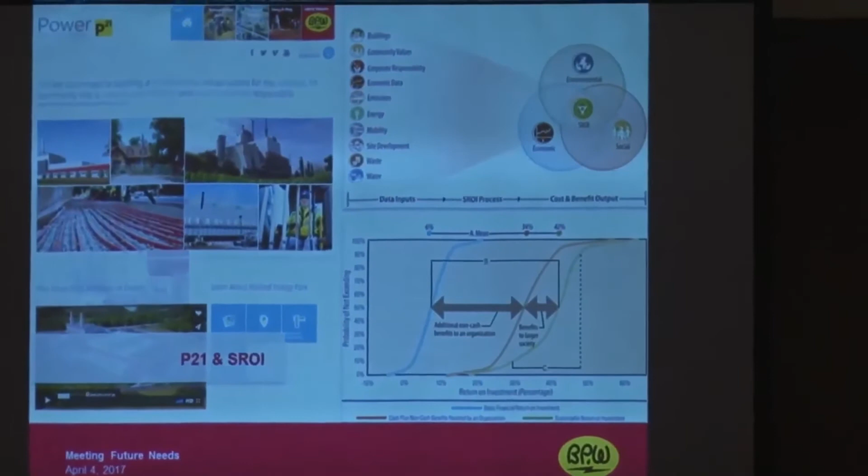They look interesting, but essentially what it means is everything is probabilistic. We don't know what the price of natural gas is going to be tomorrow, but it could be between here and here, as a probable range. We don't know exactly what the social or environmental impacts of emissions from different power supply resources are. There's still a lot of literature and research going on in that regard, but it's probably between here and here. So everything kind of came down to some probabilistic analysis.

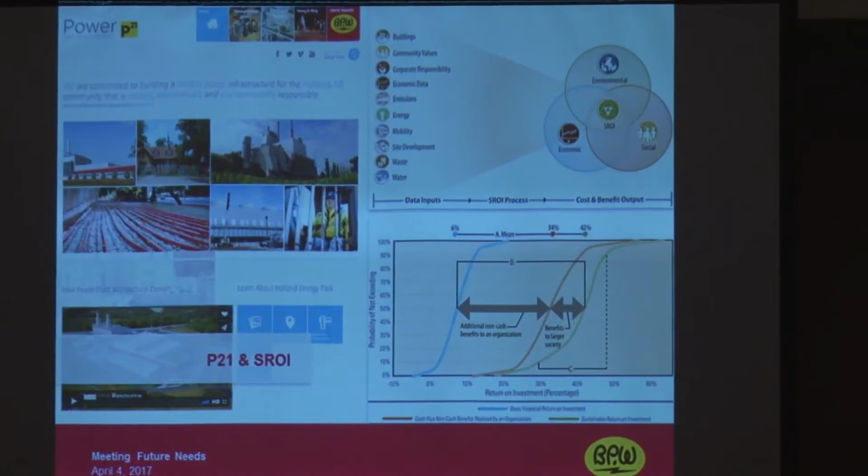But in the end, something really bright line sort of emerged, and that was natural gas combined cycle technology. I've got a sheet here on your desk if you're interested in how that works. We're going to talk about it in a little bit, but it's also there for you if you want to see that.

I've got a short video next that kind of shows the outcome of this process. Remind you that this was about 3-4 years ago, so kind of keep that context in mind.

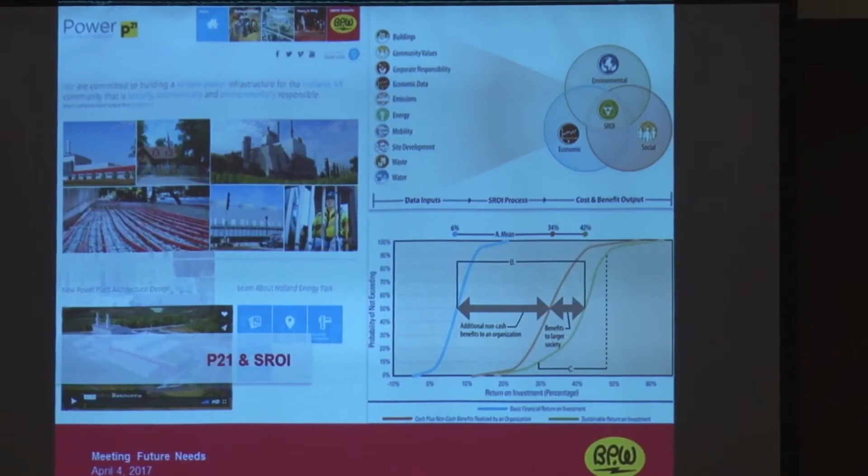Holland has always been a community that works hard, and for more than 100 years, the Holland Board of Public Works has supplied the power to keep our town growing. As our community grows, so does our need for power. By 2016, the increased demand for power for our homes and businesses will exceed our baseload generating capacity. Over the past several years, we have considered a number of ways to meet our community's need for more baseload power. It's a complex question.

Last year, we hired HDR, a global independent consulting firm, to help us conduct an exhaustive sustainable return on investment study. It looked at affordability and reliability, but also at the social, economic, environmental, and health impacts of a variety of options. The HBPW belongs to the community. Our process included people from all across our city to make sure their voices were heard. Their input helped keep us on track for integrating our new power generation with Holland's Community Energy Plan.

We looked at a lot of options, everything from state-of-the-art solid fuel generation to renewables to purchasing primarily from the grid.

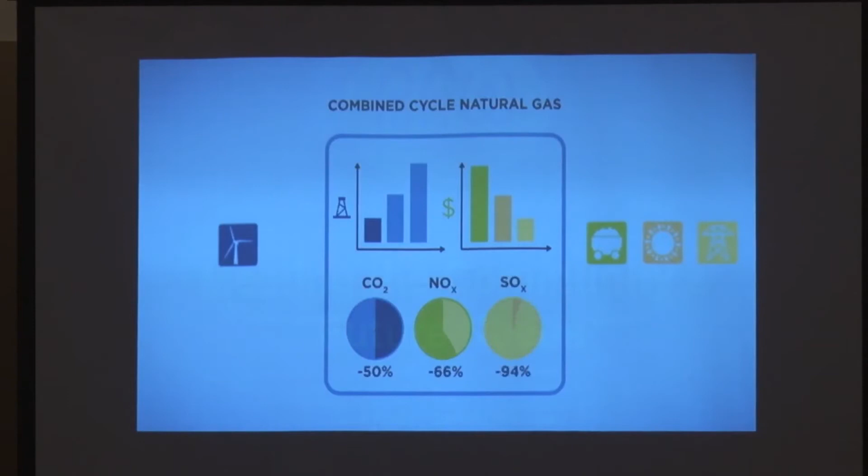One of the most promising solutions comes from combined cycle natural gas technologies. Natural gas is plentiful, affordable, and cleaner than other alternatives. With local generation, the HBPW can expand the services that make downtown great, things like the snow melt system that keeps streets clear during winter, and district heating that could heat hundreds of homes and businesses. Clean, affordable power is essential to the success of Holland's innovative community energy plan, and we are well on our way. There's work left to be done, but we're excited about the direction we're headed. As we move forward, you can count on the Holland Board of Public Works to keep Holland working.

So that was quite an amazing process we went through. I do want to highlight a little bit what was touched on there. Why is combined cycle technology an important choice for Holland?

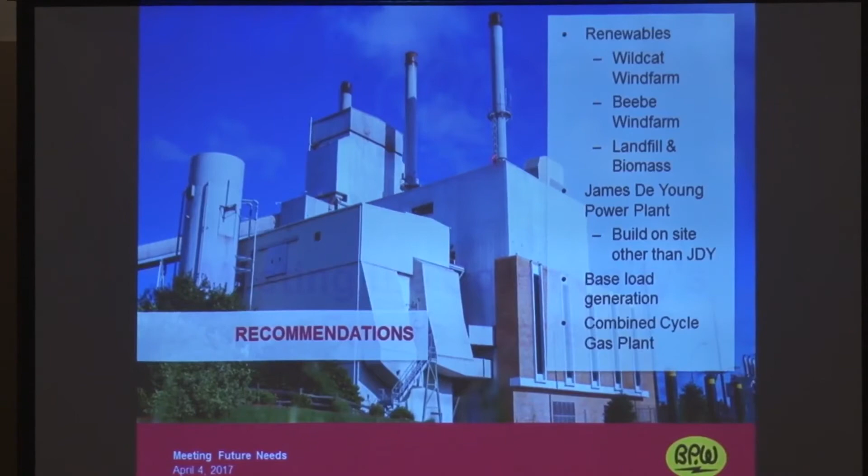The fuel source is one. That's natural gas. There's been a significant change in the economics associated with natural gas because of the emergence of hydraulic fracturing, and it is a game changer. If you look at the Marcellus and Utica shales in the Pennsylvania, Ohio area, they are now probably the dominant source of supply for natural gas in our country. A lot of pipeline capacity is being added here in the Midwest to get that out, and because of that, Holland sits in a position where it can be a very significant beneficiary of the costs associated with that. So there's a cost benefit.

Additionally, natural gas has no sulfur in it, so there's no sulfur dioxide emissions. There's no particles as you would have in coal, so there's no fine particulate matter or coarse particulate matter really associated with that. Also, because it's natural gas, it has lower nitrogen oxide emissions as well. So all of the different constituents. And then if you think about climate change and carbon, it's 50% just on the fuel itself, and then you look at the efficiency of the unit, we're probably doing much better than 50% savings per every megawatt hour that we would produce with the combined cycle power plant.

Why is it so efficient? Well, essentially what it does is it uses a jet engine on the front end of it. It's basically the same thing that hangs under the wing of a large aircraft. We send the natural gas through it with some compressed air, we fire it, and coming through that, it forces the blades to turn and turn a generator to make power, which is not new technology. That's been around for some time. Matter of fact, we have a few of those on the southeast side of town. But what comes off the back end of those generators is about 1,000 degrees Fahrenheit of exhaust gases.

Here you see the site beforehand with the mixed use in the lower right-hand corner, some of the demolition we had to do. We also tried to be very intentional about taking the opportunity to work with the community in a lot of ways as we were working with this.

We actually had SWAT teams come in and do exercises in these buildings - they were vacant, they were available, why not make use of it? We had the fire department come in and do rescue simulations. They did a rooftop fire so they could simulate how to deal with an actual roof fire. We tried to take advantage of each and every one of these things along the way to not miss an opportunity.

We repurposed a lot of materials - crushed concrete, asphalt. We donated a lot of other elements, working with Jubilee Ministries, a couple fixtures in buildings that were there, and donated other materials and recycled as well.

I think this next one might be the video that kind of shows the summary of that effort. Nope, sorry, one more - keep you in suspense.

The other thing we did is work with at-risk youth in the community. There's a program through Escape Ministries that we brought some kids in on. They helped us with areas outside the main construction site where we wanted to support the trail system that's going to be developed to the north of the facility.

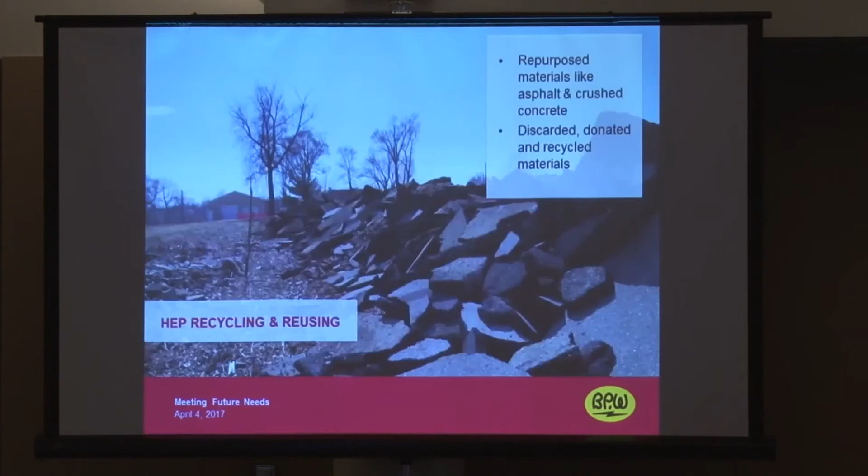Before I tease you a little more with that, I want to go back to this picture here, because if you look you can see the walking trail - a pedestrian trail in this outside area.

Directly to the north is a very interesting property owned by the Macatawa Greenway - it's a pond or wetland area back there. The Macatawa Greenway has for years been working on a pathway throughout our community, throughout that Macatawa corridor. They're very excited about the work we're doing with our walking trails because they're doing a fundraiser activity now, looking at taking off from our trails to go along the riverfront, and also building a pedestrian tunnel underneath the CSX rail that you see bordering the west end of the property.

And that would allow pedestrian access into Windmill Island.

Really neat story though is that back at the turn of the 1900s, the interurban that brought people from Jenison, Grand Rapids area out to the lakeshore, that's the path of the interurban. So there's a low section on the north side of our property, and it's interesting that now we're developing a trail system throughout Ottawa County that previously brought people from Grand Rapids or that part of the county to the lakeshore, just a different way of doing that. It's very exciting to see some of that effort.

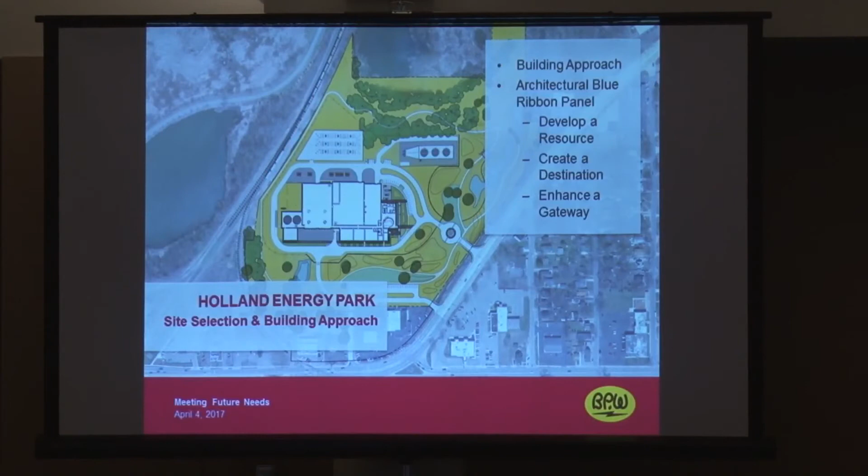That's something the at-risk youth were working on. We're planting some myrtle and other stabilizing vegetation for that.

Over most of a century, a 26-acre district in Holland, Michigan existed largely out of mind, bordering on a scenic wetland. The area had for decades stood in contrast to the community's expanding sense of environmental responsibility.

In 2013, the Holland Board of Public Works concluded a 2-year energy planning process with the decision to build a clean-burning natural gas plant on the eastern edge of the city, in the same district that had long been environmentally neglected.

The site of the Holland Energy Park is a part of our community that, for a long time, was sort of unknown to many of us. In many ways, it was a part of our community that maybe has been neglected for some time.

One of the exciting things about what we're doing there now is it not only will be a focal point of our community, but it's going to be a park and a place that we'll all be able to look at, enjoy, and really take pride in.

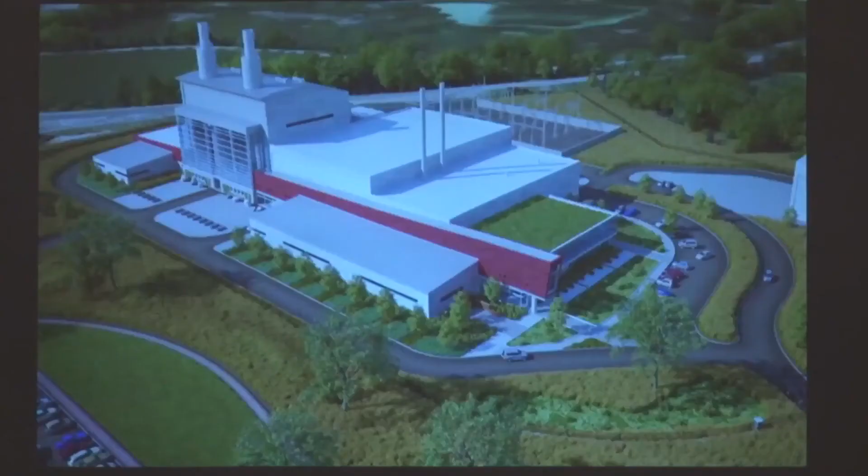The Holland Energy Park was envisioned as a showcase for sustainable power generation. Clean burning, efficient, and affordable, the facility would allow the BPW to retire aging coal-burning generators that had long powered the city.

Not only is it going to be a world-class power resource for the community, but it's going to be a destination for people to be able to come and view the facility from a number of different angles.

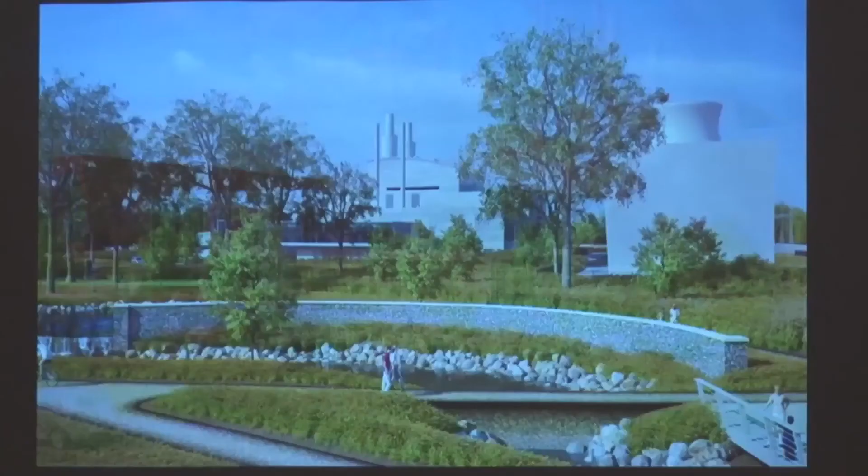We're going to connect to a lot of different natural trails and systems that are around the park, give people views of wetlands, give people an access point to really tie into hopefully an eventual Macatawa Greenway system.

First, there was work to be done. Some of the contamination we found was threatening to the environment because the soil contamination could threaten groundwater resources by leaching. And it had concrete, rubble, miscellaneous soils, tires, and things of that nature that we found a lot more extensive than we anticipated.

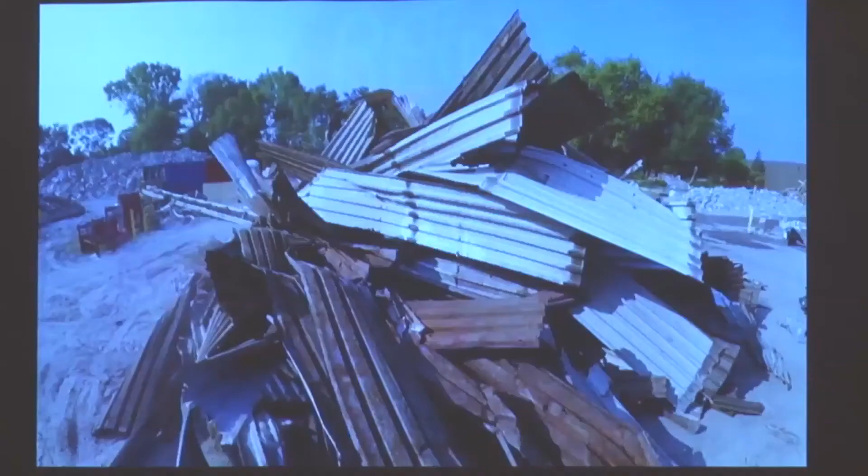As the cleanup and demolition began, the team started removing waste from the site. It included 590 tons of metal, over 12,000 tons of concrete, 11 tons of asbestos-containing materials, and over 350 discarded tires.

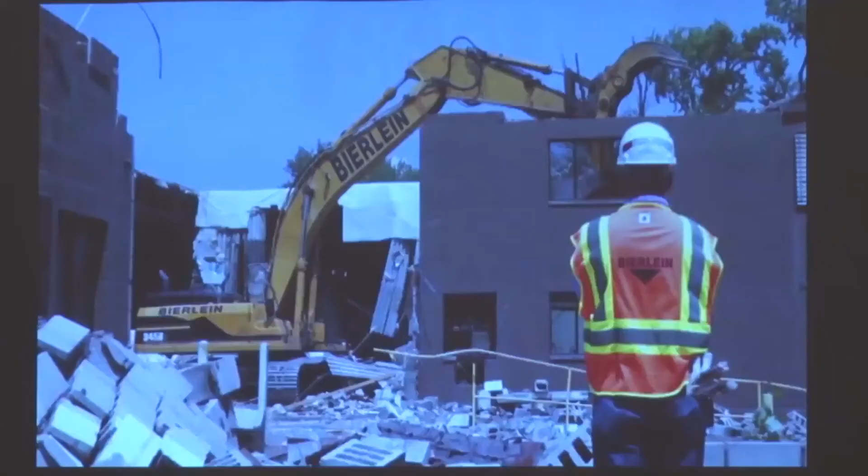We believe conservation of resources should be a part of every project. So as we got into this and started doing the demolition work, we cleaned that up, picked it up, disposed of what needed to be disposed of properly. If it was metal, we recycled it. If they were tires, we recycled them. All the tires that we pulled out of here went to a recycling facility.

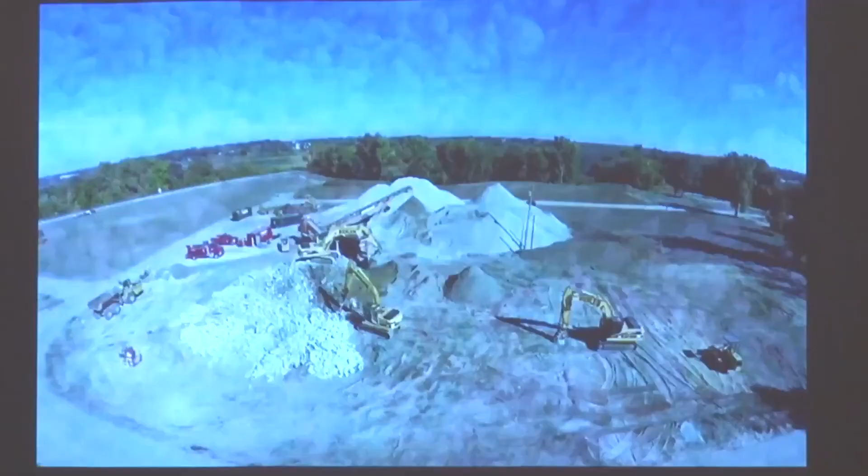Concrete, pads, foundations - we ended up with 25,000 cubic yards of crushed concrete. All of the concrete recovered at the site will be reused in preparing the site for the new park.

Also, the BPW repurposed any removed trees by donating them to local nonprofits or by mulching them for the landscape. However, not all plant life at the location was fit for reuse.

Japanese knotweed has been described as one of the world's worst invasive species. Deeply rooted and amazingly resilient, the knotweed has displaced native plants all across the site and presented an ongoing threat to the bordering wetlands. We actually have two kinds of knotweed - Japanese knotweed and giant knotweed.

They're insidious. They grow roots that are 15 feet deep and send rhizomes or tendrils out over 60 feet. We've engaged the Outdoor Discovery Center for the next 3 years to work with us to do both a chemical treatment plan as well as just physically removing it.

Eliminating the knotweed was an important step in restoring the site and adjacent wetlands. In addition, the project called for the reestablishment of viable populations of threatened, endangered, and species of concern, from plants to insects, animals, and birds.

Project biologists studied how to protect existing species and restore native habitat that would allow reintroduced species to thrive. For a long time, I had seen the plans for what was going to be happening in that location. I think even I was surprised that once the site was cleared and made ready for the new construction, really how open and beautiful the location is. I'm only now really beginning to understand what we're going to see for the next generation as we enter into downtown.

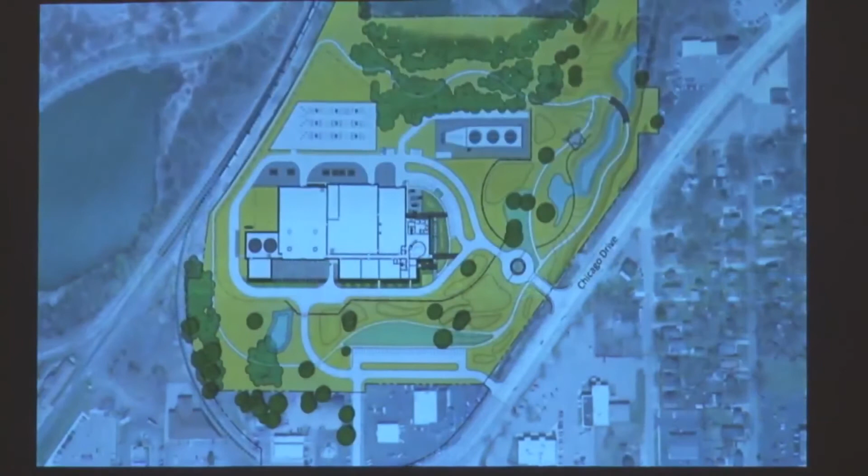The site for the Holland Energy Park is moving from neglected to natural. With a strong vision, the support and engagement of the community, and an absolute commitment to best use and sustainability, the Holland Board of Public Works took on a job that will benefit the community for decades to come.

So we're very excited about where we are at this point. The power plant is actually online. We are actually generating power with it. We're going through a series of tests. There's some contractual obligations that both the equipment manufacturers and the contractors have to meet performance guarantees. And so that's kind of where we are in that process.

So here, see some other pictures. I'm going to try to move through these quickly to make sure we have time. We did set up an observation platform. Many of you may have taken advantage of that, and that was very well used, with a lot of good conversations taking place out there. Here's some other pictures of the construction as we moved along.

This is the visitor center. This is the area - that red spine you see going left to right is a corridor, and this is sort of a spread open view of that. Up and down there will be exhibits, both interactive and static, so tour groups can come and learn about energy, learn about the plant, learn about some of the history, and learn about what they can do in their home to be more efficient. So we're very excited about being able to take advantage of that.

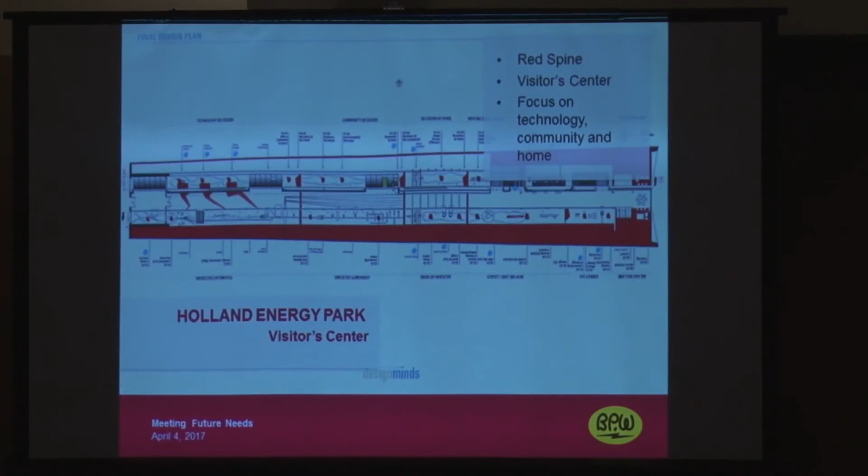There's also apertures, or windows - tall storefront windows - that look into the control room and into different parts of the plant along that spine. That'll be opening around late September, early October of this year. Another view of that and some of the work. Again, that was a collaborative process - we engaged the education community quite a bit as we went through that.

Also want to talk a little bit, as we move past power, about what's going on downtown with fiber. BPW has been in the fiber optic business for a couple decades now. We've actually supplied some of the bigger businesses in town with fiber connections. We have not been the internet service provider though - we don't provide the content, at least we haven't to date. We partner with internet service providers to do that.

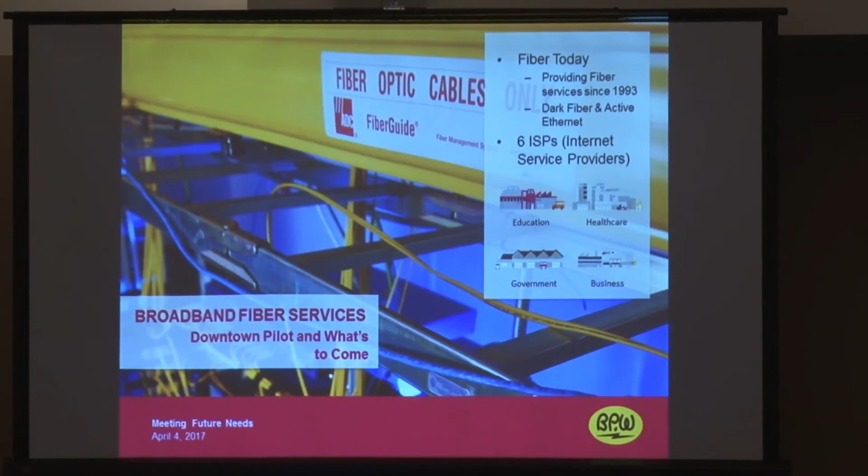There's been a lot of interest in what we can do with the residential sector and with some of the smaller businesses. So we're exploring some newer technology that will allow us to be more cost effective. We had a pilot in our downtown area with a couple buildings - the Lokers building, the Butch's building, and the Riverview building - and a couple coffee houses where we did some Wi-Fi down there. It was gigabit.

So what does that mean? Well, that's 1,000 megabits per second - a very, very fast type of speed. That's the kind of thing some of our businesses downtown have been craving for. So we set up a pilot down there, and now we're looking at rolling that out further through the downtown area, covering blocks from like Lincoln all the way down to Pine and 7th and 9th Street with the deployment of fiber later this year.

We're also looking at becoming an internet service provider ourselves so that we could provide an alternative. We still want to provide an open network though, that others can serve their services across. The pilot was last year; now we're expanding it this year. We hopefully will be done with that construction by late summer so that we can be deploying it and getting people hooked up in the downtown area in September of this year. Another short video real quick is coming up, showing the result of some of the experience that one of the property owners had downtown.

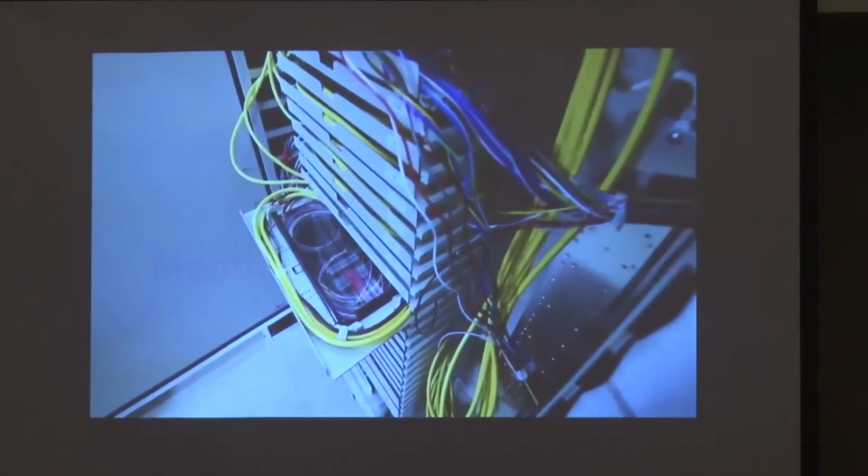It is efficiency. We don't really think about the times we're waiting for websites to load or downloads to happen, but that little bit of time adds up, especially in our business where we're always connected. The BPW fiber has been a connection much better than we could have afforded otherwise.

We're nerds, so the first thing we did is test everything out. How can we really saturate this thing and put it through its paces? And we couldn't do it. We couldn't fill it up. We couldn't saturate that connection. It just didn't happen. We do a lot of video communication with our clients, whether they're in California, Bahrain, or anywhere.

We need to be able to see them, see reactions. It's so much better to have a face-to-face conversation. That makes us look better, we can do things faster. We aren't having problems, we aren't apologizing for our internet connection all the time. And it also helps people want to come here, want to be in our office, employees and customers. That's a great selling point for us as a company.

This is huge for Holland, both to attract businesses but really to help the ones already here. We are so much more efficient today than where we were, and we haven't had to worry about any outages or slowdowns. A lot of times we're connected over a secure connection to the West Coast - can we make that go a lot faster? Do software updates download a lot faster? And the answer is yes. Everything, yes. It's so much better, so much faster, and completely reliable.

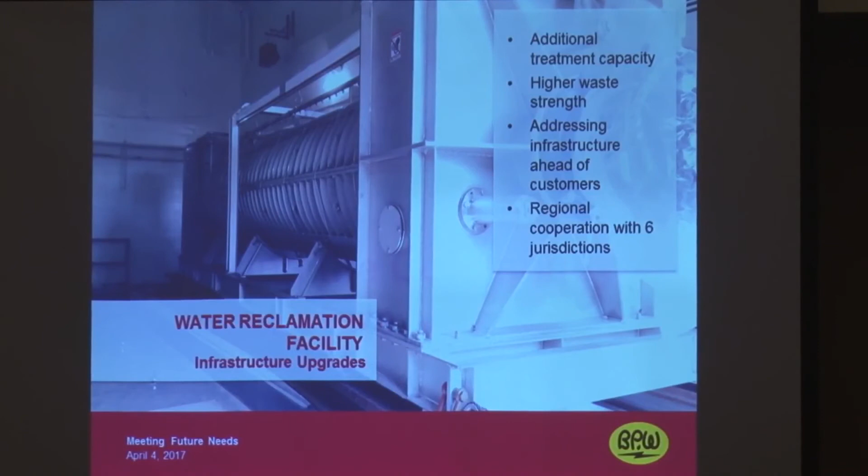So we're real excited about what the next step is with that, and there'll be a much greater conversation as we look at taking it beyond the downtown. Some challenges associated with that from a financing perspective and getting the assurance of the capital recovery on that, but it's going to be an important conversation, and we'll have a community conversation again about that.

Moving on to water reclamation - this is our nice way of saying wastewater. We've made significant upgrades there. One of our biggest sectors in the community is food processing, and with food processing, a lot of times you get some higher strength wastes that come down the road. So we want to make sure we were ready for that. We've made about a $20 million upgrade in our wastewater plant this year to help with that.

I have some booklets on your tables, and I also have more on the center table here. It's called How It Works. I'll hold that up right here - if you have that, it's kind of nice because it shows you inside. Please pass it around your table, but it shows how each of our utility functions operates, and wastewater is an interesting process.

We think we do it really well because we're on a compact footprint, and we needed to find a way of increasing our capacity. We did that with our $20 million investment without adding any new footprint. We added about 30% treatment capacity to the plant.

We also helped an end-of-life situation with some of our biosolids handling. These are screw presses here - yes, they squeeze what's left over, and then you take it to an area to dump that. So probably not a lot of good conversation to have about wastewater.